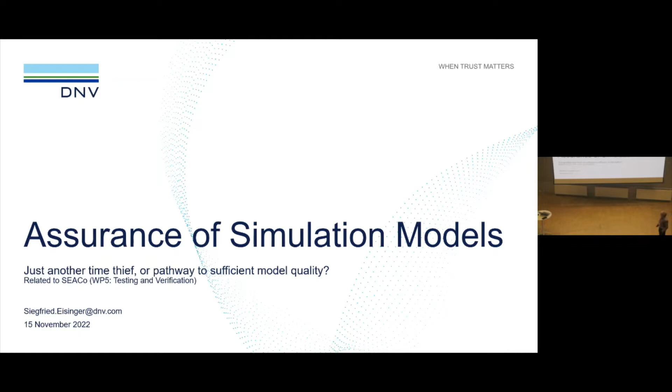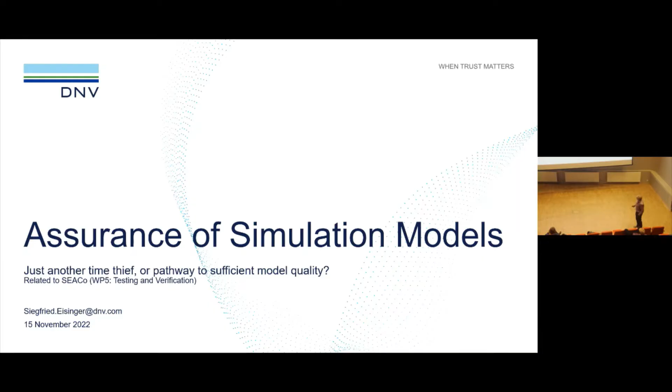I am also DNV, as you have maybe understood. We have worked also, Klaas was included in this project about assurance of simulation models, where we made a recommended practice. I'll come back to that. This question is also related to our SEACo project, which we are currently running. There also Stian and Severin and others are involved. Our work package 5 is just this testing and verification, which I relate to. Right.

We have basically two challenges. We have global challenges related to change, so climate, supply chains, increased system complexity, which means we need new technologies. We should deliver yesterday, right? And trust may be lacking. And also this digitalization thing which everybody talks about, and it's a global trend, so nobody wants to be left behind, and it also increases complexity again.

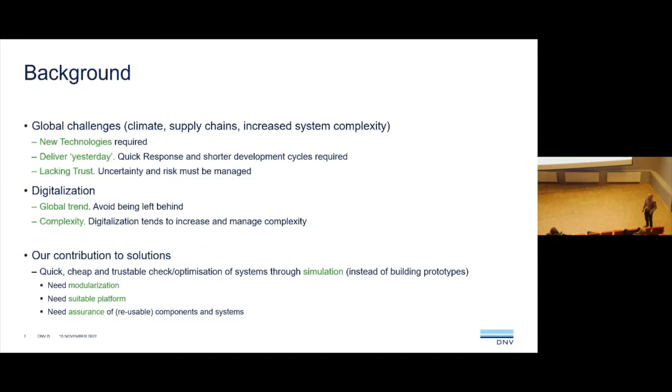So how can we handle that? How can we build trust in our simulations, or overall, really, how can we build trust in the applications? And the answer is very often simulation, as we all agree, I guess. But again, when things get more complex, then modularization is an answer, and a suitable platform. I talk here for OSP, so I guess we understand that.

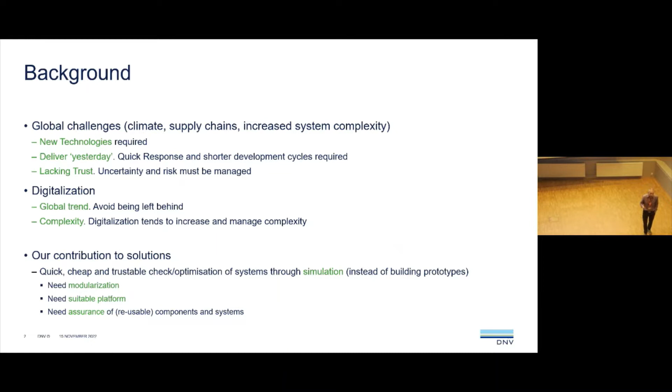And then also the need for assurance, because sometimes we may trust the simulation models a lot, and if it goes wrong, we might be lured into thinking that reality behaves otherwise than it will later on, which might even be a disaster, or it might cost a lot of money. Both are not acceptable. So modularization is one answer to that. Again, we have seen similar things today.

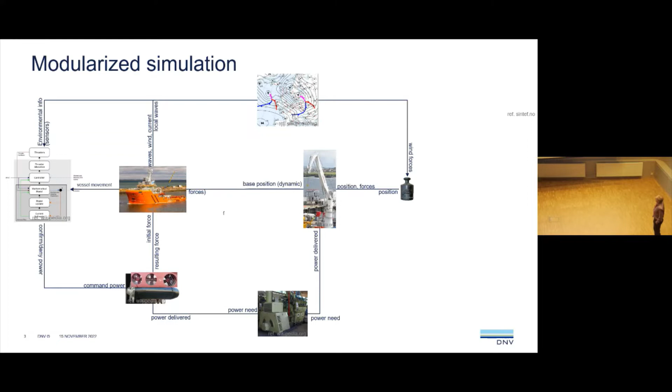So by having such a modularization, we can ask the vendor of a DP system: before you deliver your electronics, can you also supply this FMU to us? And then we put it in the model, experiment with it using FARN or whatever, and solve a lot of problems before the whole ship is built. That becomes especially relevant when we introduce new technology, because there we can't know beforehand, but maybe we know the bits and pieces of it. That's the basic setting of OSP as we hopefully know it. So that is the SEACo use case.

And then this trust thing. We say that if we want to trust in the decision support, this is the end goal, right? We want decision support from the simulation model, but how can that be? Well, only if we can trust the simulation model. And how can that be? Well, we need to trust the components. If that is not there, we have a problem. And therefore we have developed this RP.

So how do we do that? Through a conceptual model first. I will come back to that, because while we made this RP, we found that this conceptual model is actually one of the key points here. Verification and validation are something we have all heard of. Maybe we sometimes confuse them, but we have some understanding of what this is about. But the conceptual model is something we always have in our head. I say that nobody makes a model without a conceptual model.

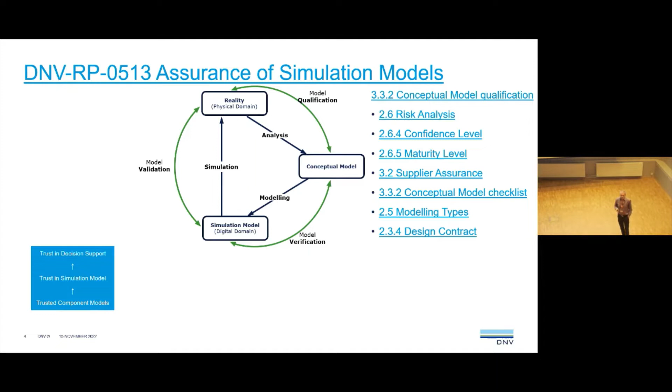But to make it consciously and to put some quality requirements on top of this conceptual model, that's the point here. So we do the qualification, risk analysis included. We have something which we call confidence level, maturity level. Can I do this complex model, or should I have somebody who knows better?

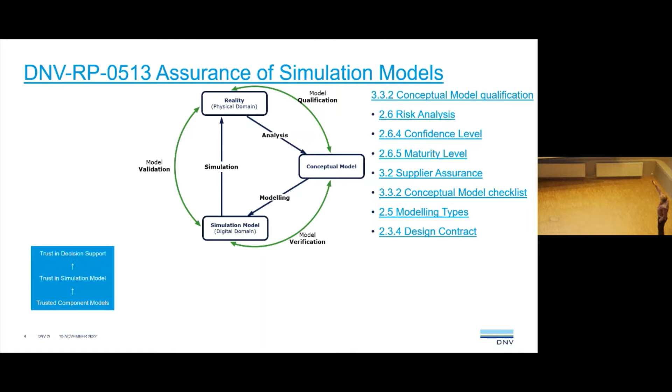Checklists, and we check the modeling types and a lot of things here. So again, you can click on that, and I will come back to some details. So that's about the conceptual model and what needs to be done there. Then the model verification, Klaas has been a little bit into that. Test methods, verification activities, things like that.

And in the end, when this all is done, we want to do the validation, and that is checking whether what we made is actually what we wanted in the end. So we check against the reality. Does it produce the correct results? So that is basically what is included in this RP, and the appendices A, B, C. They contain tables of things which can be done and should be done, and where one can pick the things which are needed.

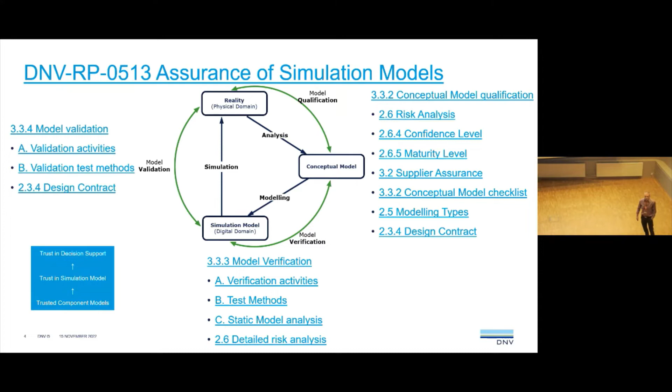But when we look here, this looks complex, right? And you see a number of documents here. Well, is that just another thing which produces documentation and is not really worth what we need to do? So another paperwork regime, and it seems contrary to quick, doesn't it? But what we say is it's not contrary to quick, it's contrary to quick and dirty, and that's an important point.

I think that many models and also many software packages seemingly are quick, but when you think about the rounds you need to take because you have not done a proper concept, for example, in the end it turns out it's very expensive. So to have the right speed on things and to arrive more directly to the goal is an important point here. And some efforts which we are thinking about is the better structuring of essential activities. So therefore, this conceptual model is very important. Assurance and necessary documentation is a natural part of the development process.

So I just put this little Python code there because that's for me a symbol. If we could do all this qualification and verification work as part of the development, similar to commenting while you code, then I think it would get much easier. So far, we very often do it in the end when we have partially forgotten things and it's very hard to pick them up again. We forget, we make errors then. I hope we can get to such a thing like that.

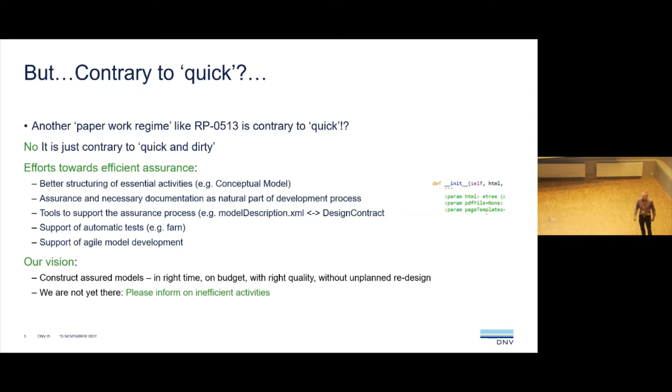I think it's doable, but we need to work for it, and don't accept any type of documentation where it's hard to argue that it's meaningful. I think there's so much documentation which is maybe not meaningful, and we need to discuss that and not only accept, oh, somebody wanted that, so I do it, whether it feels right or not.

The point is, when we have tightly coupled systems, the simulation time steps can get very, very small and maybe can't be handled anymore. And also to maybe make them small temporarily, but then speed it up again could be a good idea. And that's things we discuss here, a more accurate and reliable co-simulation so that we get the uncertainty under control when we have a number of components. And then the last one is this assurance thing, testing and verification.

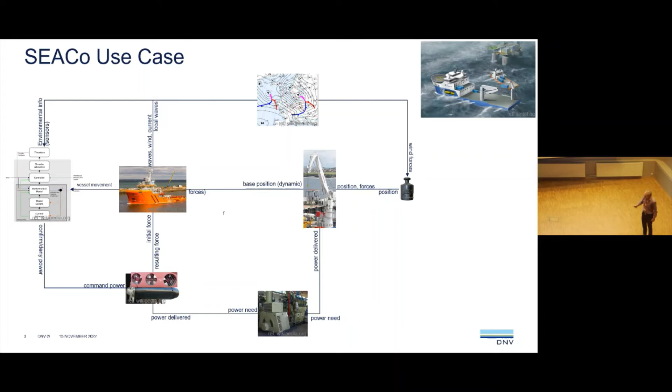So I just pick this crane. You know, I have showed you the top model here, right? The crane gets here. And the crane, it's maybe not hard to understand that it has some of these problems inside. Sorry, say here, right? Because we need to have environmental problems. I come back to that. Maybe I can just go.

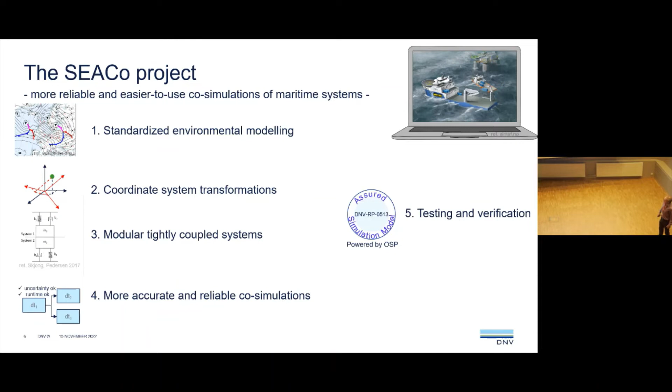Oh no, can't. Sorry. Right, coordinate systems we need to transform because the crane has its own coordinate system, but the ship has another one. So we need to translate these to each other, and the crane will tilt when the ship tilts. So we need in some way to handle that. Modular tight coupled systems, yes, the crane is fixed on the boat, but the boat tilting renders tight couplings here. So there is this problem, and how we should handle the uncertainty is also a clear problem here. So the crane here, it includes actually all of these problems.

So I have listed some of these here, and we want also to trust it, because when you want to use this crane in the end, for what? Well, you may want to, for example, do operational planning. I want to do this job with the crane. Yesterday, I was visiting the provider of this FMU, and we discussed the case that a heavy lift was done far out, and then the hook broke, and this created actually a big accident. It hit the ship in the end, and then the ship hits the quay where it stood. A lot of damage. Just such a thing, right?

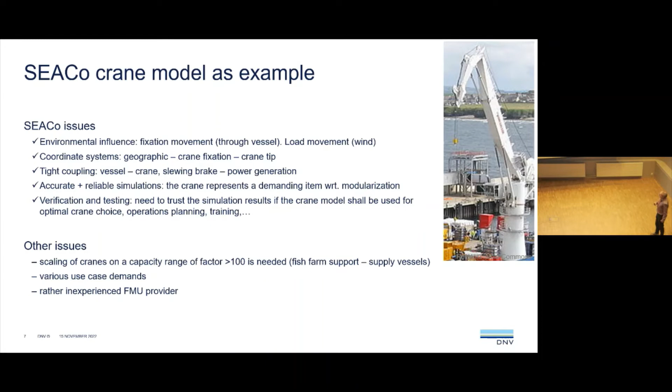And maybe one would want to simulate such a thing, and if the simulation says, okay, that's fine, we can do that, and it doesn't matter, and in the end it happens and it matters a lot, that's not good. So we would like to trust the simulation to get the right results. For example, to find out how far can I go with the crane in some wave heights. That's a concrete question where the simulation hopefully will help and give us good enough answers. Not exact, can't be, but good enough. So yeah, let's move a little bit on.

This concept model, I have shown a little bit of what it includes. One wants to do an objective. One wants to define the system boundary of this component model. Requirements need to be defined. How do I want to model that? In the crane case, maybe one uses bars and connects them in some way, and then finds the position of some things. So maybe it's just a mechanical model in this case. In other cases, it's hydrodynamics, and you need to do a lot of things there.

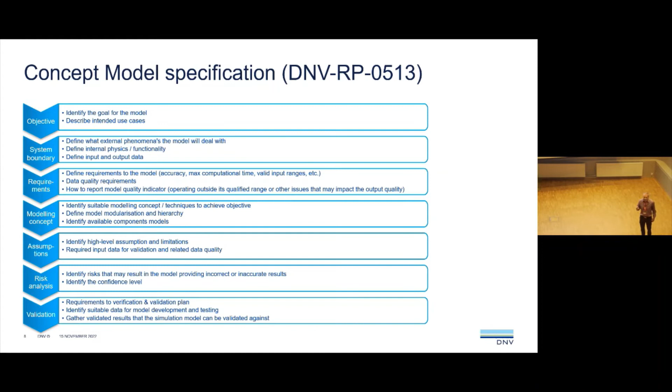Assumptions and limitations need to be listed, and that's a thing which should be done throughout the whole project, and keep this list going and keep it up to date. Risk analysis we want to do because we don't want to be fooled by the model when it's compared to reality. And already at this early stage, it's often necessary to also discuss how we want to validate that, because finding the data to do so is often time consuming. So that is something which should be discussed as early as that in the project.

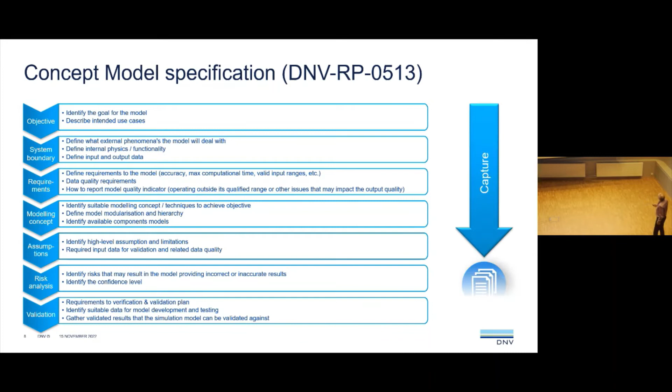And that whole thing brings us to this design contract, which is basically an extended model description, including also this type of information. What do you want to use this model for? Because only when you have documented that, it's safe to use it in the end. I mean, I can make a model for my coffee machine, but somebody says, look here, it contains a control system, nice, I use it for my nuclear power plant. Obviously, it doesn't work, right? And it's ridiculous, but it happens. Not as bad as that, but still, and we need to avoid that. Okay, yeah. I think this conceptual model will really help us. Use the time to make it, and then go more directly to the goal of having a good model in the end.

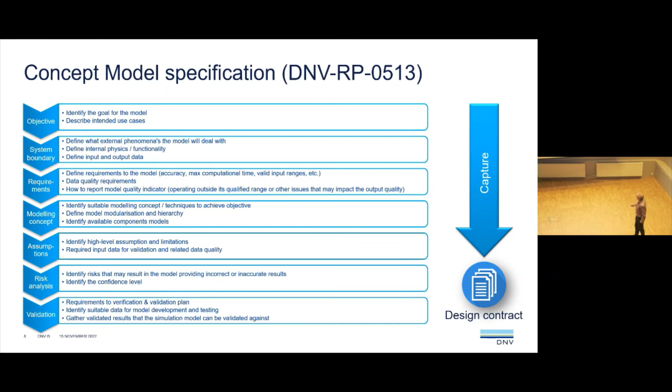So some more details. We had a workshop on the crane where we made colored small pieces. Yeah. Our findings.

It's the battery, I guess, right? I switch it when it fails. Brilliant. Works. Maybe you can switch a little bit down.

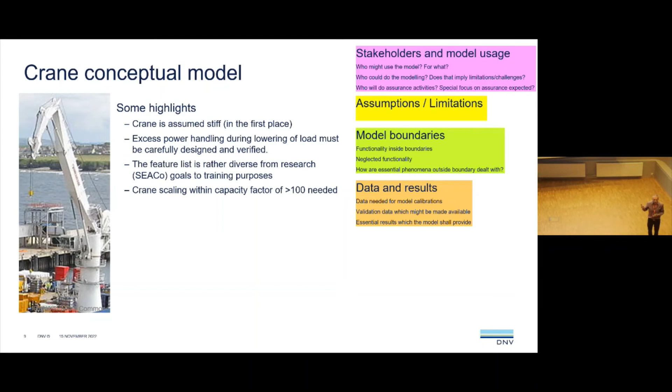Okay. Yeah. So let's just go a little bit into some of the details as a final thing here. The objective, we went through all the stakeholders. Who could be interested in such a model? It's the crane model designer, the ship class could be interested, a vessel designer could be interested because he wants to integrate a crane, and of course the end user, and as you see in this short point list, it's very different things they want to do with this model. So a good model should include all these features, and therefore it's important to identify all the stakeholders first, and then make the model.

The boundaries we discussed, so that's just part of the system model I've showed before, identifying a little bit of the connections we have here, and what we now discussed yesterday when we discussed details here. Yes, there is an additional connection between the weather and the crane, because wind forces will also be important directly on the crane structure. So that comes in addition here. But beyond that, I think this gives a good picture of what is important here as connections.

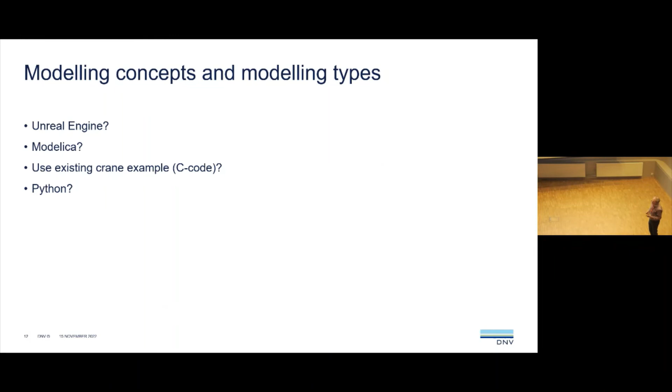Modeling concepts, we have not yet decided that, but it could be Unreal Engine, it could be Modelica, some code there. There is an existing crane example, but it's C code. Do we want to use that and extend it? Or would we make just a Python model? It's not decided, but we need to find that out. It will be some mechanical based thing, because the mechanics are the most important things here.

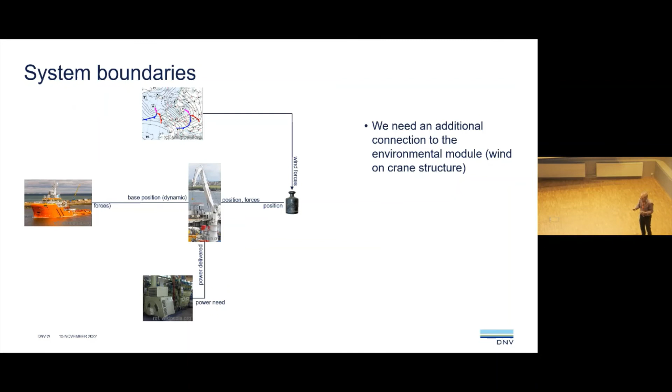Because then you need to know where is the steering wheel, where is the house here on the ship, stuff like that. Otherwise, it's not there, and then it would just mean to list here obstructions are not included, and that's what we say now in the first version. Later on, maybe we need to include that.

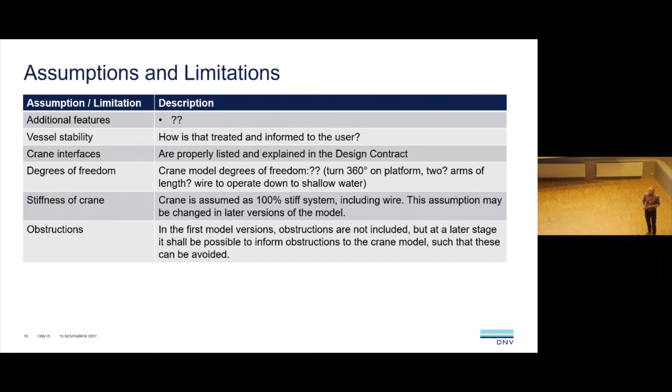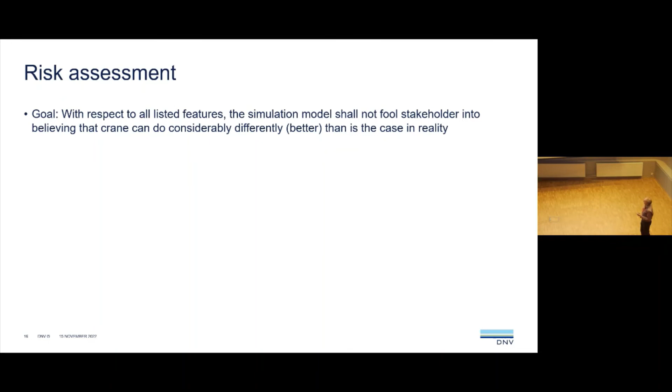So risk assessment, the goal would be to check that we are not fooled in any way. It's not done yet. We found out that we need to do that later when we see more about the model. And availability of data is not simple, at least for our partners here. So maybe we need to contact the oil industry to get data, because they probably have cranes with more sensors installed.

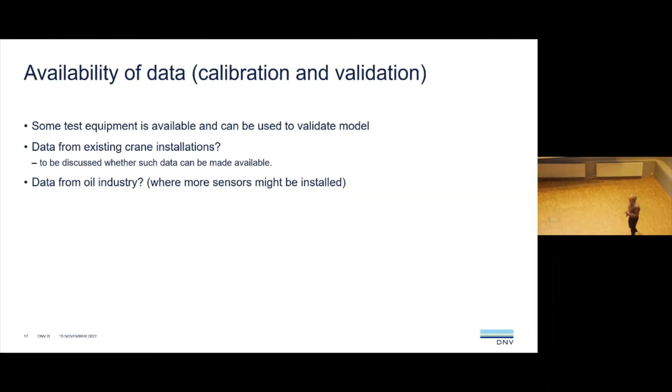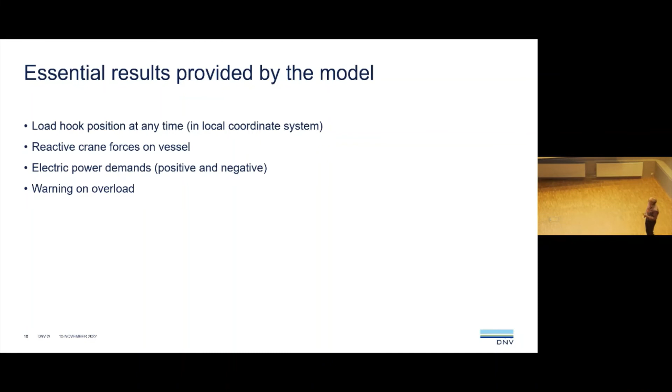Yeah, and here are some of the essential results we want to get in the end, but this is just a list started, and will be increased later on. Right, I think we are here. Yes, thanks.

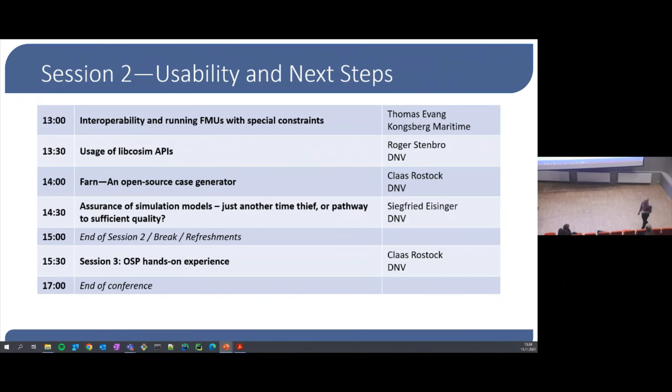So, thanks for the presentation. Secondly, I would like to ask, what about the coupling of the movement of the crane and the hydrostatic state of the vessel? Because if you move the crane, it has a load on it. Yes. It can change the balance of the ship. It will. And that shall be included, at least to my understanding. Yeah.

Fixing the crane on the vessel includes accelerations here in this case, right? Both from the crane to the ship and from the ship to the crane. So these need to go both ways, and that's just the point about these stiff couplings. Really, a very good point on that. So when you get these problems, then the time increment must not be too high, because otherwise you get uncontrollable results, basically. So yeah, that will be an interesting thing to see in the end.

Yeah. Also, about use cases, I think in the offshore structures area they use a lot of simulations like that, like cranes on floating devices, etc. So I think there is a lot of research in this field. Yeah, I think cranes are focused on a little bit currently. I have seen some other projects too. Yes.